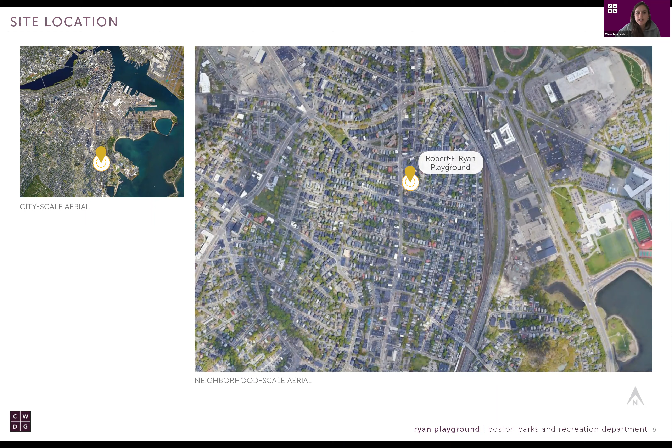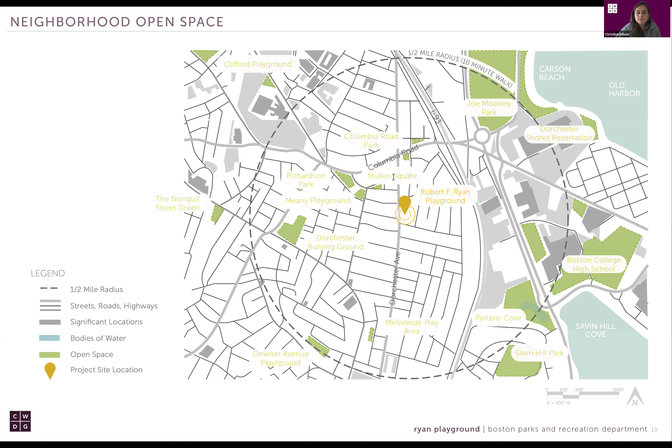We also looked at the neighborhood scale, block scale, right around what's going on in the streets around the playground. On Dorchester Avenue, right across the street, there's that business plaza. There was the former Dorchester Market, Tom English's, which is going to be a new mixed use development. Around the corner, the Little House Alternative School. On the same side of Dorchester Avenue, just north, there's the condominiums and the gallery space. And then to the south, across Harbor View Street, there's the Baptist Church. Moving in either direction, there's single family and multifamily homes.

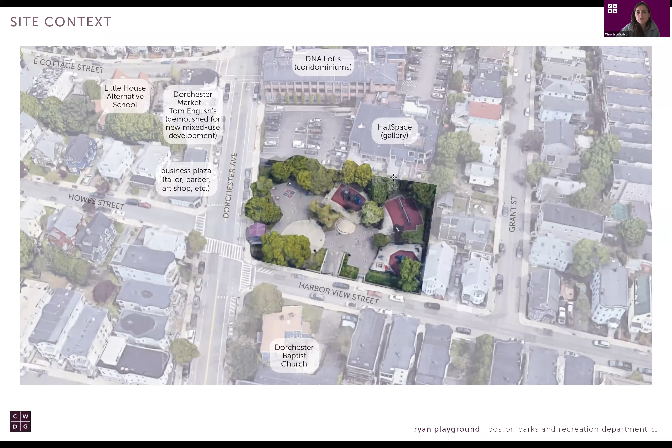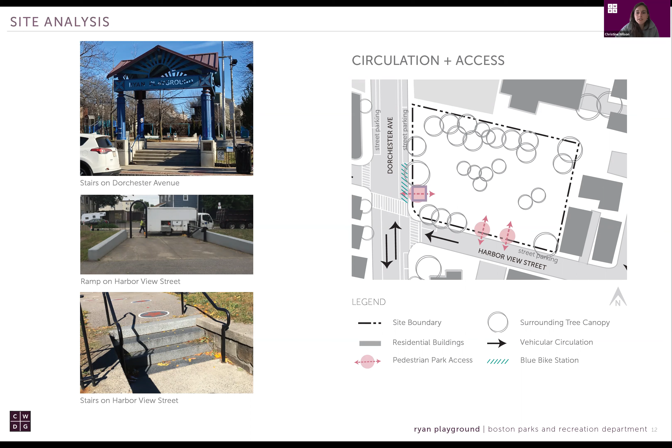We also took a look at assessing pervious surface and site lighting. Pervious surface is looking at softscape versus hardscape, areas where stormwater can infiltrate into the ground versus running off hardscape and collecting in the storm drain. The softscape can absorb and infiltrate pollutants from runoff. This isn't as big of a deal here because there are no parking lots or roadways flowing into the playground; the playground is above the street. But the amount of pervious surface, or softscape, also contributes to urban heat island effect. It mitigates it. Hardscape increases it, softscape decreases that environmental effect, providing some cooling for the neighborhood.

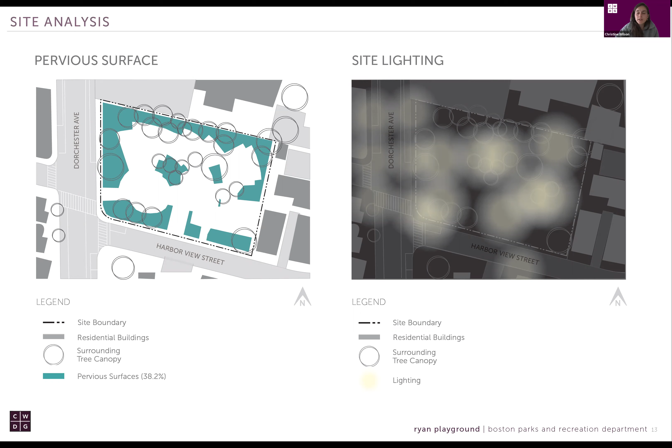As far as site lighting, that's important for us to look at because at night, what areas of this playground are well lit, what are not so well lit, and to what extent are they well lit. So we took a look at the lighting as well in our existing conditions analysis.

And I think the last thing I'll touch on is our trees analysis. We had a certified arborist go out to the site and assess all the trees. There's a variety of species out there, which is really awesome, and a lot of the trees are in good condition, some not so much. So we took a look at the condition of the trees and the species of the trees as we move forward into the concept design.

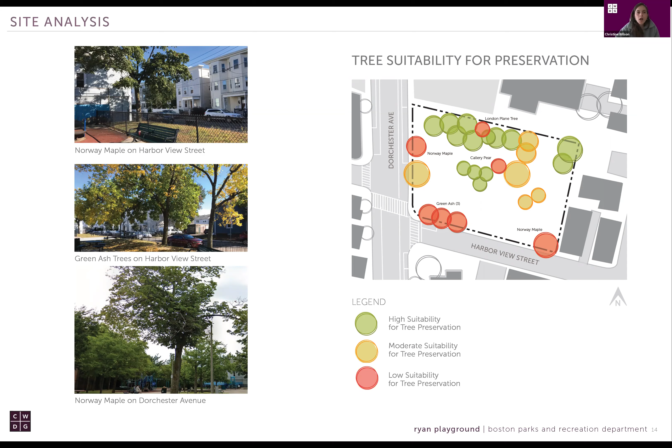Just kind of moving around in a circle, going down to the water play area. There's art tiles in that water play zone. What we heard in the very first meeting was that community members would like to see a water play area that is twice as big as this, because it is so popular in the summer.

Moving up to the entry gateway—I'll get into this because we asked about it in the second survey, about people's favorability for the entry gateway. Is it important to keep it or not? And what we've heard is not. So that's the entry gateway, which is great. I'll get into this later because it opens up some opportunities to create better accessibility into the park.

And then pavement games up at the top. The hopscotch is in that large paved area, as well as the chess tables and other art pavement markings. Over by the 2-to-5 area and the swings, there's that drinking fountain, and then there's the frog, and there's benches throughout the park, and a flagpole right near that entryway gateway. So those are kind of all the pieces to the existing playground.

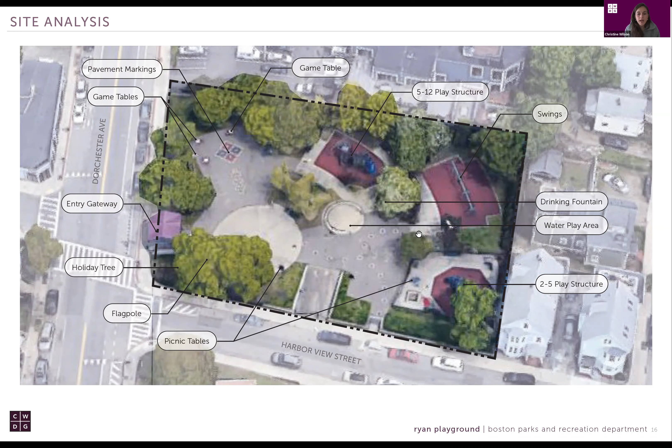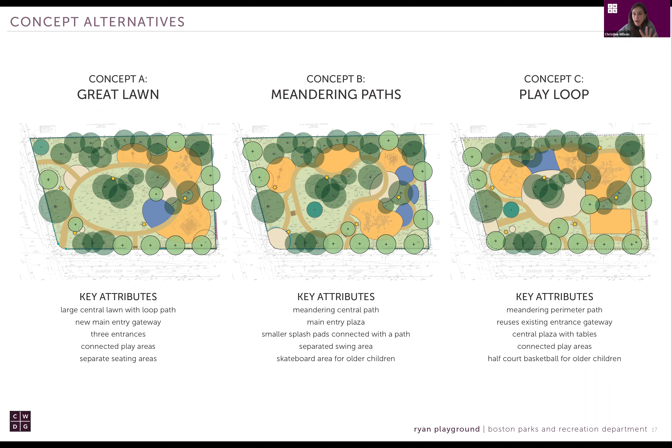So like B mentioned, after that second community meeting, we posted an online survey and got 48 responses, which as a designer who works on a bunch of parks and playgrounds, is a pretty great turnout. Thank you all who participated in that survey, it's really helpful for us to understand what the community needs. As a designer, I don't have a preference.

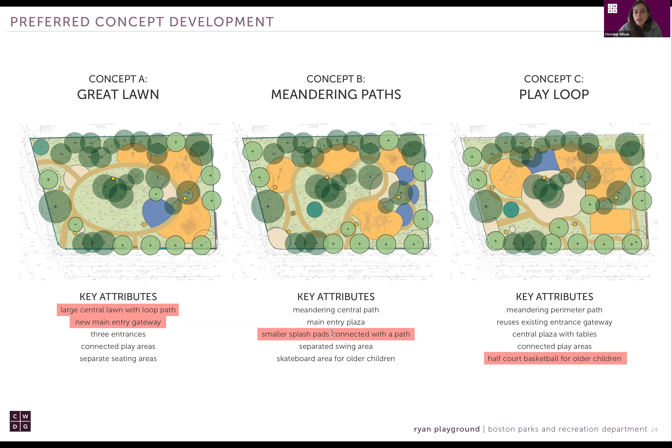So then someone said they think a basketball court is more useful than a skate spot, which checked out with the other survey responses. And then someone said they like the Great Lawn. Taking that, we realized it wasn't one single winner, it's a combination. So we went back to the drawing board to come up with a concept that merged the most favorable aspects of each concept into one, really trying to apply the feedback we received in the surveys to the design.

We're looking for your input and kind of your buy-in on this as we move forward to build you this playground. So I'll go through the preferred site plan first, then open it up to comments and questions. After that I'll move through play element options, because next we're selecting play equipment for the design. It's not just about the layout, but how this space is located relative to other spaces, and we'll be selecting the equipment that goes into these spaces, and we'd like your help doing so.

We'll be posting a series of images, four images per topic, and we'll ask you to vote on those through the chat or verbally by raising your hand. After we've gone through all that and gotten all the input, if there's still time left over, we're keeping it open to discussion. We want to make sure everyone who has something to say or ask has that opportunity. So this is really the last chunk of the meeting.

Okay, so ready for this? We're going to dive into the site plan. Ta-da! Let me walk you through this. Dorchester Ave is on the left, Harborview is on the bottom of the sheet.

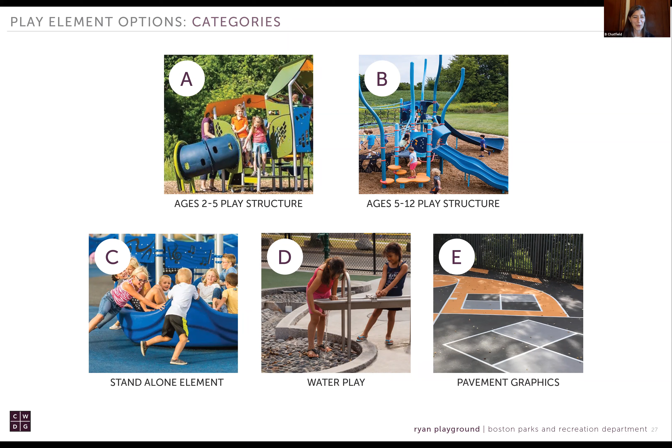It will help us as we move forward to select equipment and refine design to get this extra bit of input from you all. Also, if you feel strongly about something, you can just raise your hand and talk about it too. So both options exist, we just want to hear from you, whatever way is most comfortable. So first I'll talk about this 2 to 5 age area, and addressing the comment we received about slides.

You may have seen stainless steel slides - those are the ones that tend to get really hot. At Martin's Playground, that's a bit of an exception recently for Boston Parks, because they had a shade structure over it to prevent how hot it gets. Shade structures are quite a big ticket item cost-wise, and we've heard about a desire for them from the sun and rain, but putting them over all the play equipment might be pricey and not feasible. But not having the metal is really helpful for temperature.

So for slides, Aaron's daughter wants slides. There are some options - yes, there will be slides on both the 2 to 5 and the 5 to 12, but it could be a tube slide, it could be a double slide like you see in A4, or a curving slide like you see in A2. If you have a preference on slide type, that would be really helpful to know.

Also, these images show different approaches to climbing. A1 has that ladder that you climb up versus the steps with the transfer stations. Most pieces have the steps with transfer stations for accessibility and inclusivity, but the ladder types are different. The rope climbing types are also different between the play structures we have available to select from.

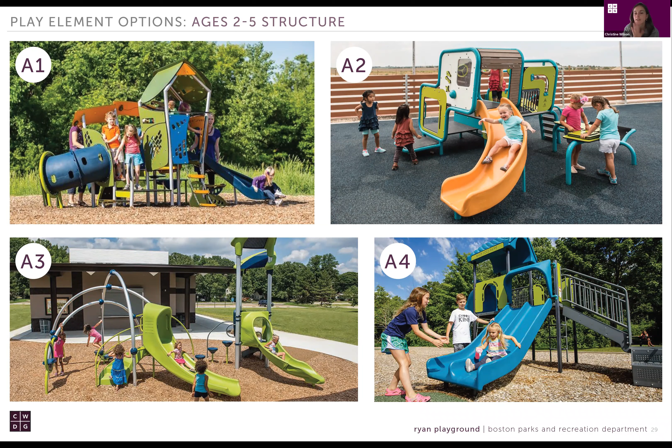Okay, so with that, again, continue putting input into the Q&A. I'm going to move to the 5 to 12 structure. So lots of different options for 5 to 12, like different options for sliding - some of these are taller. B4 is that piece that's in Dorchester Park, the playground that was mentioned earlier, so that's a really tall piece.

Some people view the downside of it as not being super transparent, and maybe not ideal for caregivers if your child's way up high, but let us know your thoughts versus one that's more horizontal, like the one shown in B1, which is not as tall and more long, more multi-platform, post and platform with a bridge connection. B2 also shows the bridge.

And as far as the slides, B3 shows this new product that really widens out at the bottom. B3 also shows a double slide. And as far as climbing and bridges, there's a variety of different climbing and bridge options shown here.

So do you have a preference for more of the rope climbing shown on B4, or do you like the hand-holding climbing better? Or there's the poles that come straight down - either or, these are at an angle, and there's also the fire poles that come straight down.

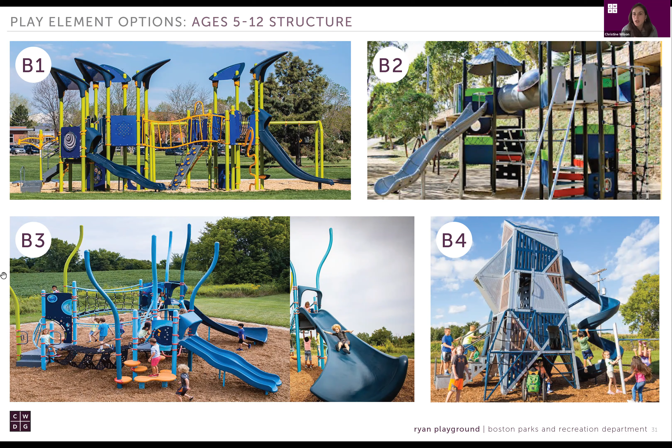So we got a lot more, but I'm gonna keep adding, please. I see a bunch coming in, so keep adding your comments. I'm just gonna move forward to the C group.

C is this area that's between the 5 to 12 tower and structure and the swing set, the 3 bays of swings. So we're going to be putting back 3 bays of swings. You have the toddler bucket seats, the belt seats, the ADA bucket seat, but we're also thinking there's an opportunity for something else.

It could be a dish swing, like what's shown in C4, or it could be a spinning element, a group spinning element, C1, or it could be a group swaying element that goes back and forth. This is an inclusive element, so if someone's in a wheelchair, they can be part of the spinning or the swaying.

C2 is more like the individual pieces, I think someone mentioned earlier. So do you have a preference for C1, C2, maybe a couple C2s, C3, C4? Or alternatively, the structures could be bigger. We're trying in a playground design to address spinning, swaying, swinging, climbing, sliding, all these types of play in the equipment, but there's this zone where we think we can fit another element. Just wanted to hear your preference because we won't be able to fit everything.

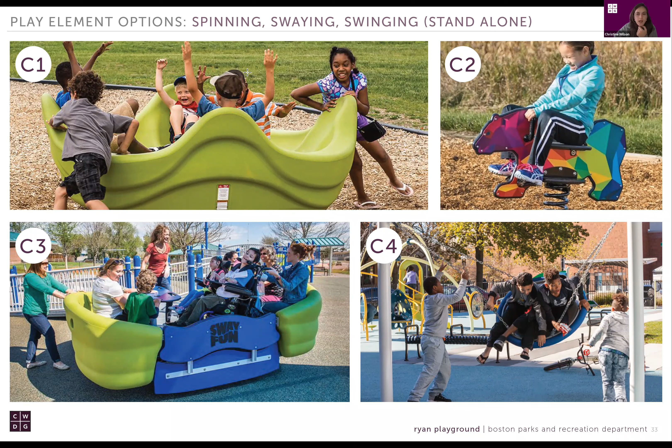And if you have—I don't know, Christine, if there's any hands raised? Not at this time. Okay, but if you feel strongly or want to expand on your preference for the water play design, or anything else we've gone over, you can just raise your hand.

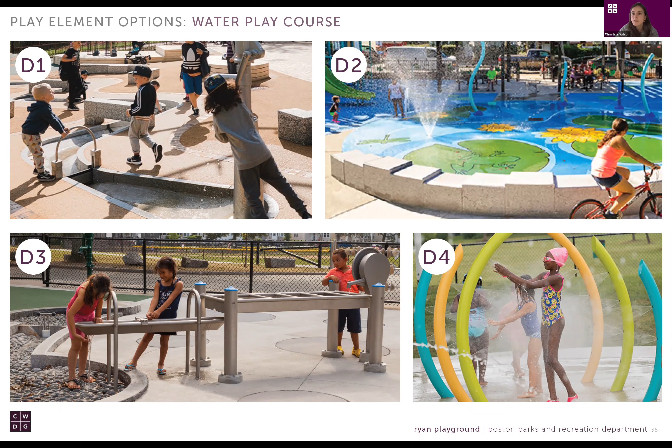I'm very, very grateful. I don't know, was this the last slide we had, or do we have more? Just the last one, the graphics—for the water play, the D2, folks talked about the color and pattern, and then this last comment about it being used in the winter. Maybe there's something cool we can do with the graphics, so it's a place that's activated in winter as well. What do I mean by that? When there isn't water going at the water play in winter, and maybe when kids aren't playing basketball, what else could these spaces be?